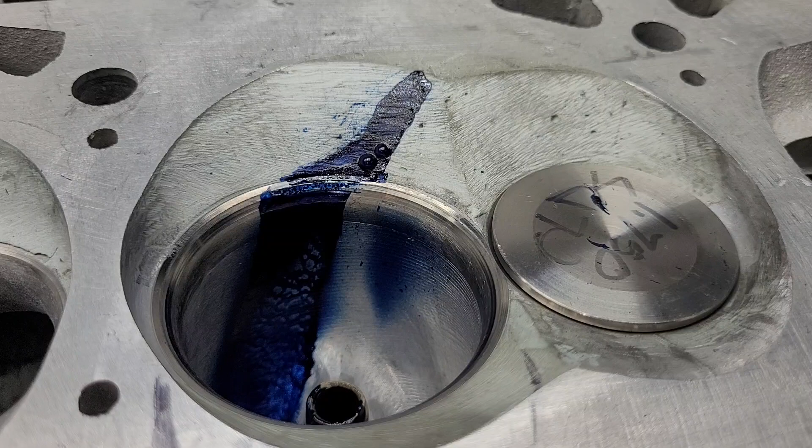Okay guys, we're going to start on the inside cylinder of the old CNC head. I don't think it's going to need a whole lot of work because according to the owner, these were the inside ports that made much better power. And we went over, this would be like the good port in a big block Chevy, this would be like the bad port in a big block Chevy, because of the way they go into the chamber.

I do think it's very interesting that our liquid flow is very similar in the chamber itself to what we had on this side. This side I didn't quite spray enough, but you could see which direction it was going. And it is on the other side of the bowl, right? It's on the straighter side of the bowl.

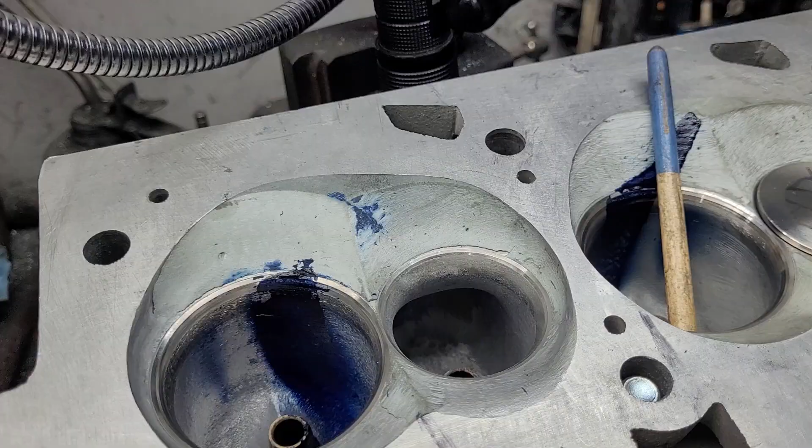Let's do the stick through the port trick. Okay, I'm going to try to do this one-handed. Not easy. Alright, we have the stick going through the port, laying right on the short side. And you can see our liquid flow kind of follows that. We do have a nice amount of liquid on the other side.

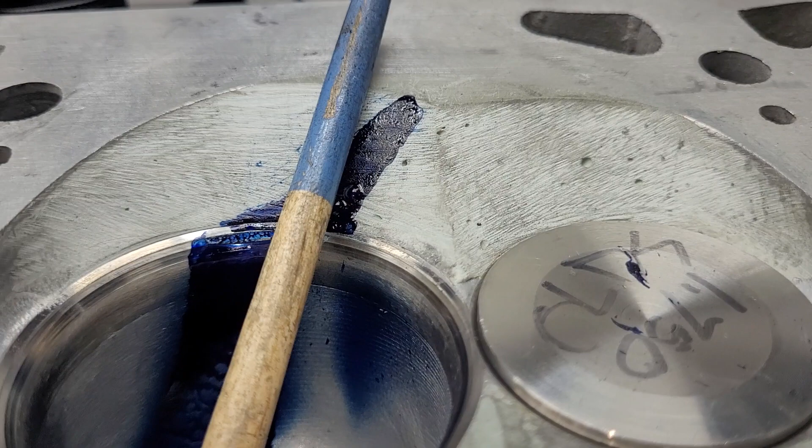Let's take a look at the chamber. I should have said the bowl. Alright, it looks pretty good. Not exactly the same as the other one, but not bad considering the only thing that's been done to this is I had to put a valve job on it because it wouldn't seal. I think that's it.

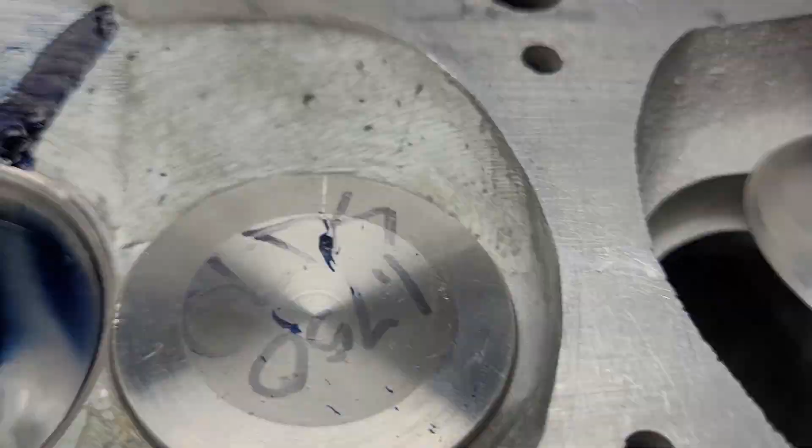The liquid flow on the valve is not great, but I think with some airspeed work we could probably get that better. That is quite a bit thinner than what we've got on the bad port. Is it the end of the world? No, but I would like to get it a little bit thicker if I could.

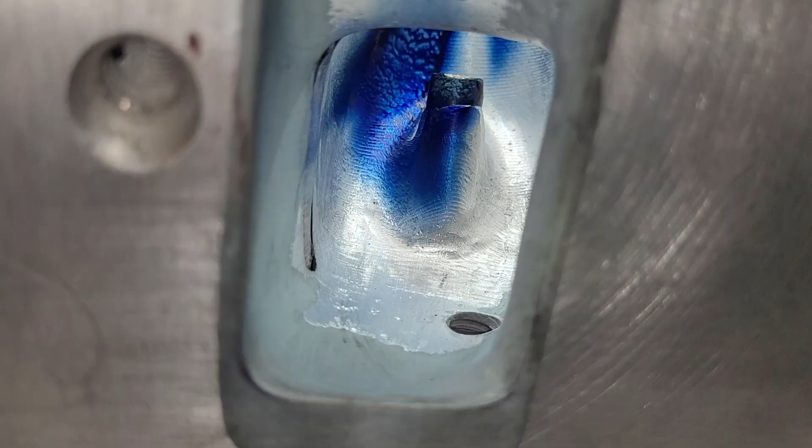Okay, right down its throat, you can see we've got a bolt boss, and we do have a ground out bolt that's fitted to that. Not sure exactly what he's going to do with that, but I'm not going to be changing that much.

I did test it with the bolt in. The bolt has some sealant at the end. Was it leaking? Of course it was leaking a little bit. There's no doubt about it. In order for it not to leak at all, it really needs to be completely sealed, which I'm not doing.

Our liquid flow looks pretty good, actually, I mean, it's a big port. It is lazy in spots. But, like the owner said, this is the higher horsepower port. And if you look, this has a much tighter turn. I think I drew it on top. I think you can still see it. It's got a much steeper turn out for the short side radius. But it works better.

Now, he did say I could open it up for the push rod because notice where the push rod is. It is right on top of it right now. Now, I'm going to take a look at my airspeeds and figure out whether I need to do that or not. Since it is the better port, it may not need that push rod popped out. I'm going to take a good look at that and figure it out.

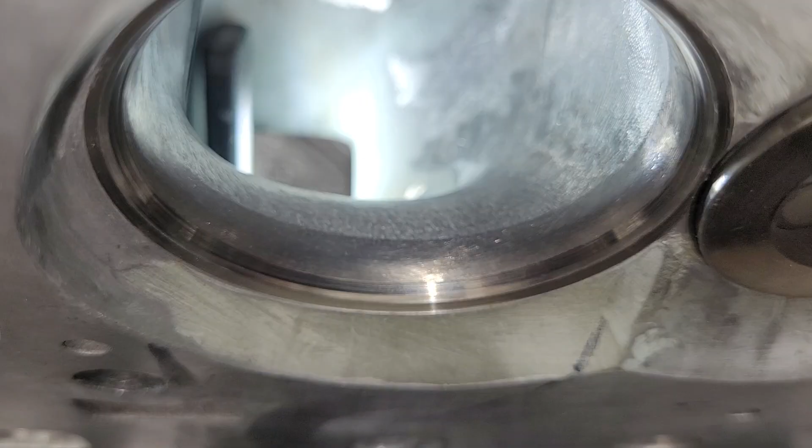Alright, the short side radius is obviously my work. You can see the radius before the bottom cut going into the bowl, and then my light burr finish on the short side radius. It doesn't look like I polished it, which probably should be on the list of things to do.

Okay, this is the short side on the outside port. Let's compare them. Okay, they shouldn't be the same because they enter the cylinder at a different angle. So I will change that a little bit if I think it needs to through the airspeeds.

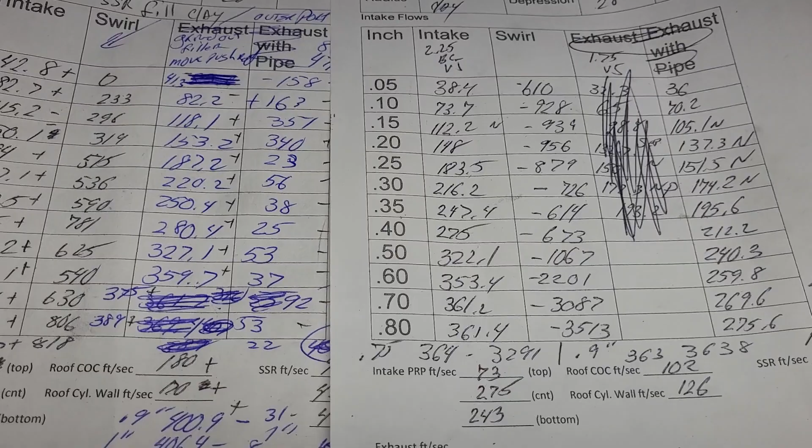Okay, these are going to be the last flows that you saw on the outside, when I ground old body filler and baloney out of it, and got a good gain everywhere with a little bit bigger port.

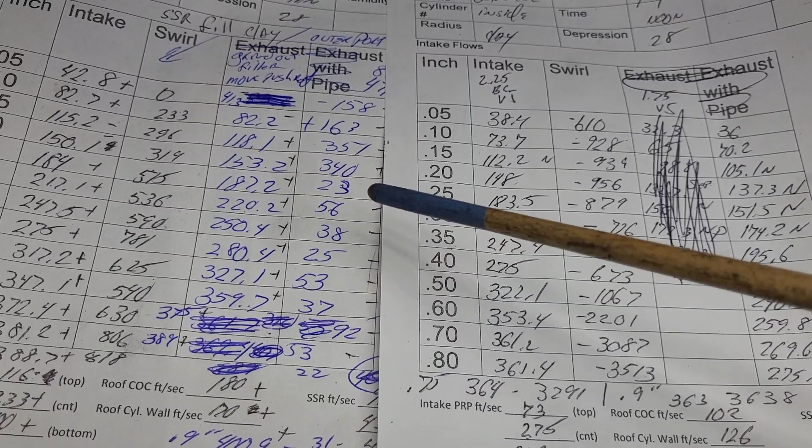Okay, well, how do they compare with the port that just had a valve job and some short side radius work? Is that the better port? Well, let me do my pluses and minuses here.

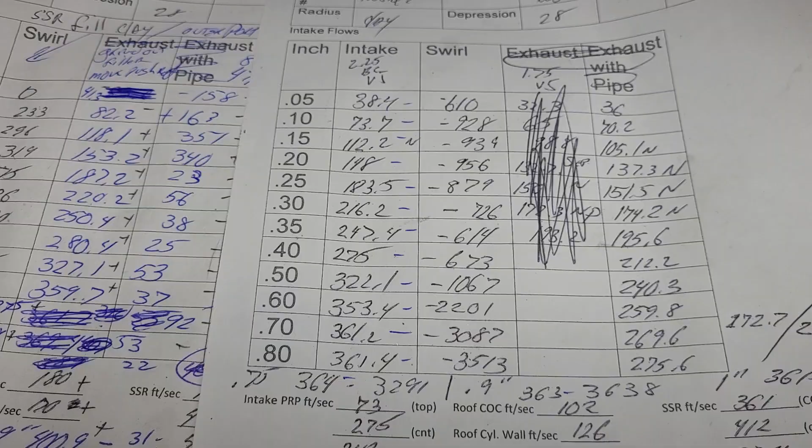Okay, I apologize for the scribble and mess. It really gave me a hard time getting flows out of this, partially due to a hot garage, partially due to incredibly bad guides. It made it a challenge. But let's see how we did.

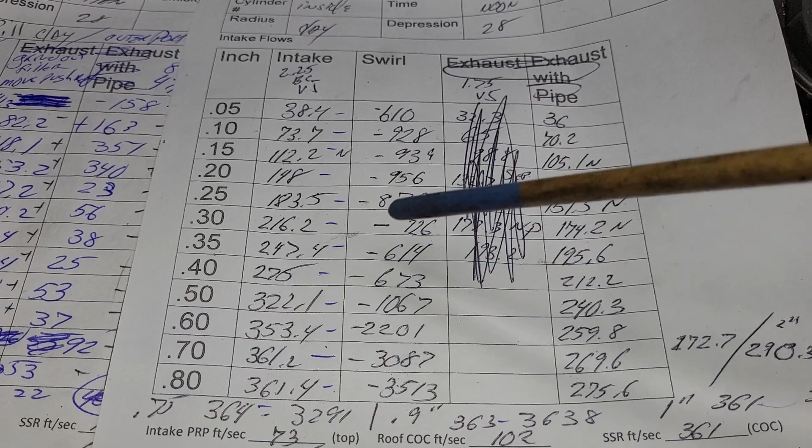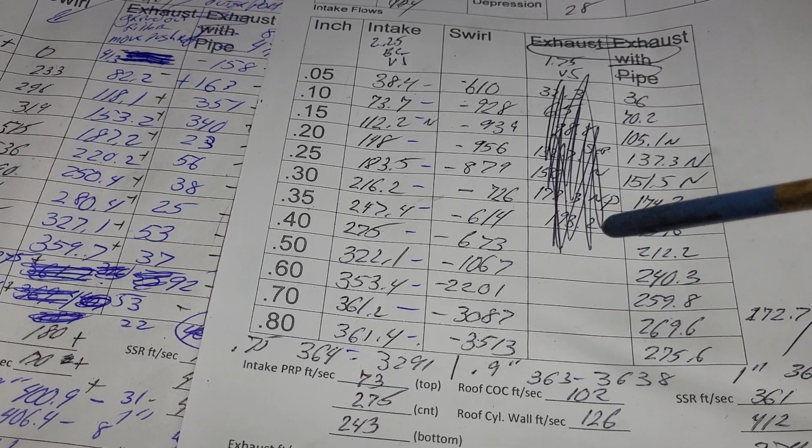We got a minus, minus. We got a minus with noise. Minus, minus, minus, minus, minus, minus, minus. Minus at 750. Minus at 900. And minus at 1 inch.

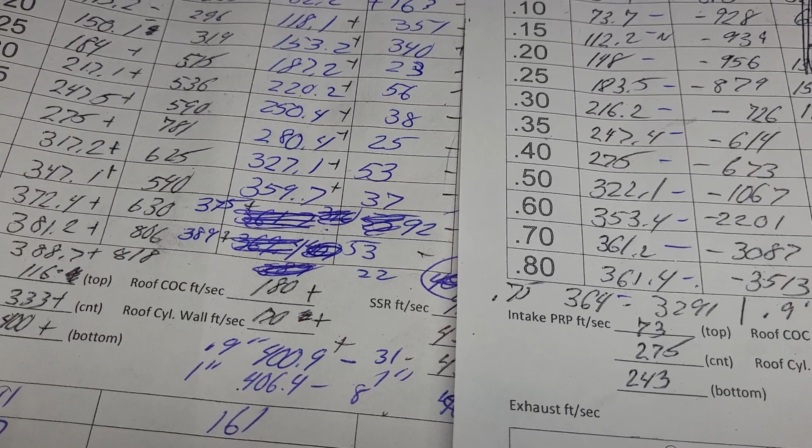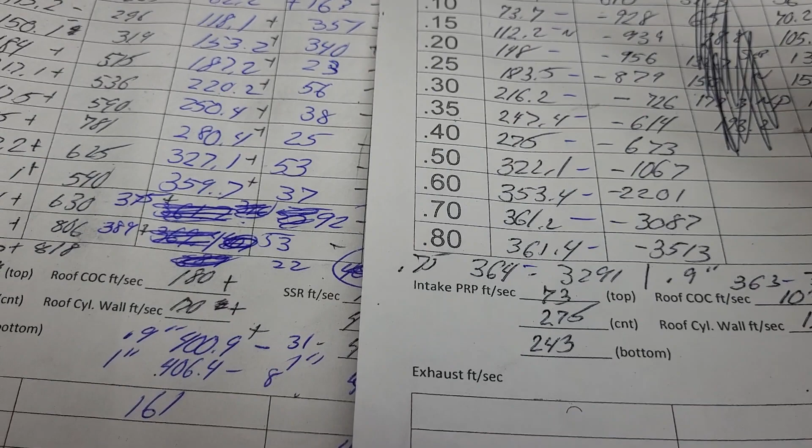Okay, this one over here was 381 at 0.75, 400 and change at 0.9, 406 at 1. Now, I don't think they're going to run that high a lift, but it does give you an idea of the stability of the port.

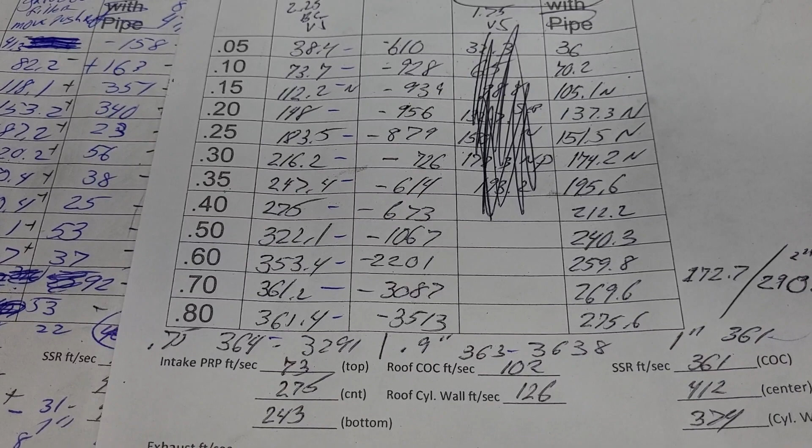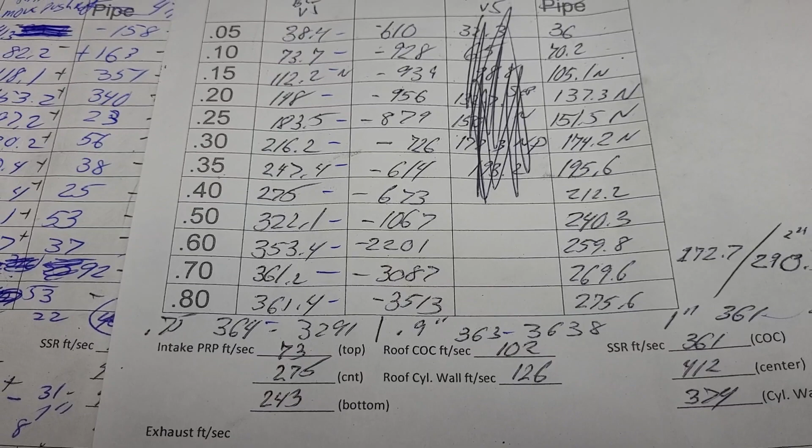Right? We would like to see it keep going up as the valve lift goes up. That would be ideal. If it starts going down, you know it's really having trouble with the short side and it's starting to separate. Okay, let's take a look at...

So overall, it's not bad, but it's not nearly as good as this one. You can see after 600, it stays with it pretty close. After 600, this port just walks away from it. That would make a noticeable difference.

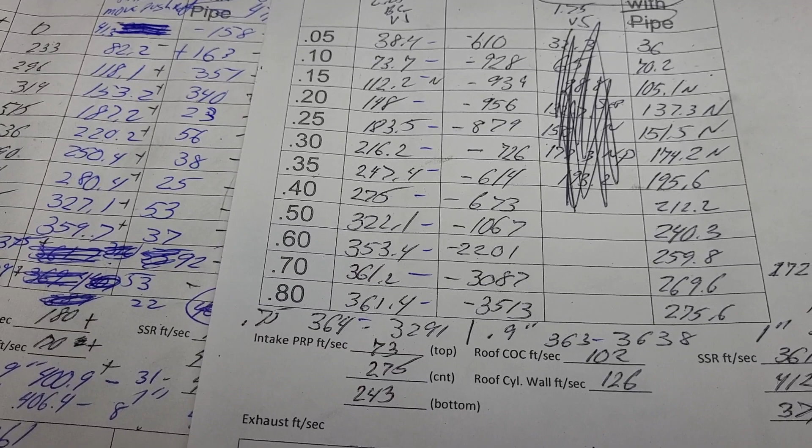Okay, all of our swirls for this port are negatives, which means the swirl is going around this way. It wasn't that way on this one — we actually had our swirl going around the short side on this one, right? This was our negative direction.

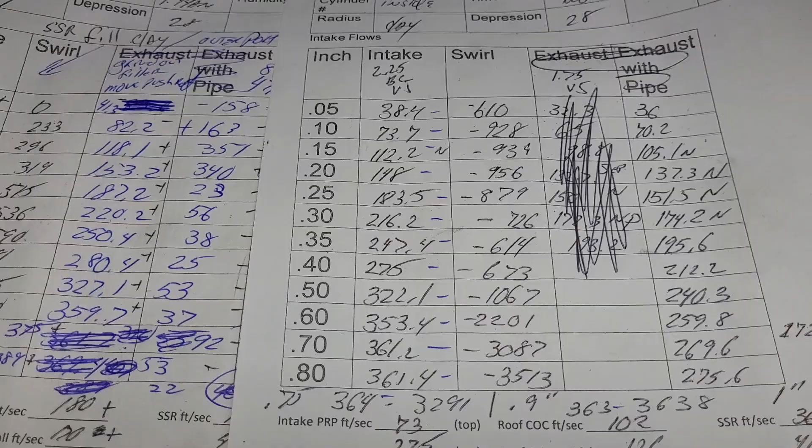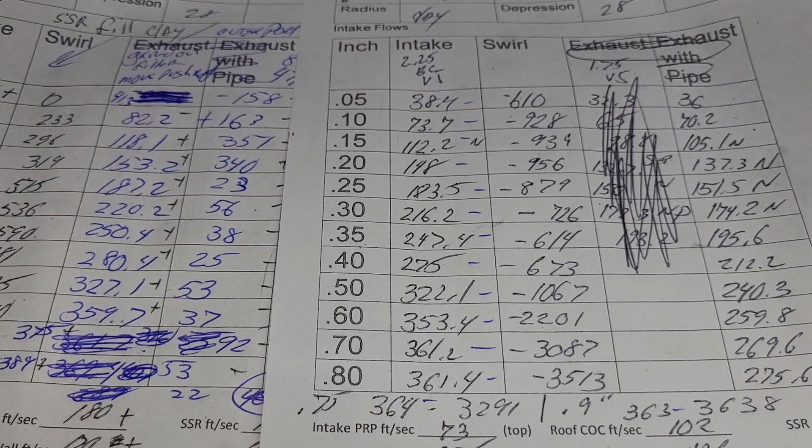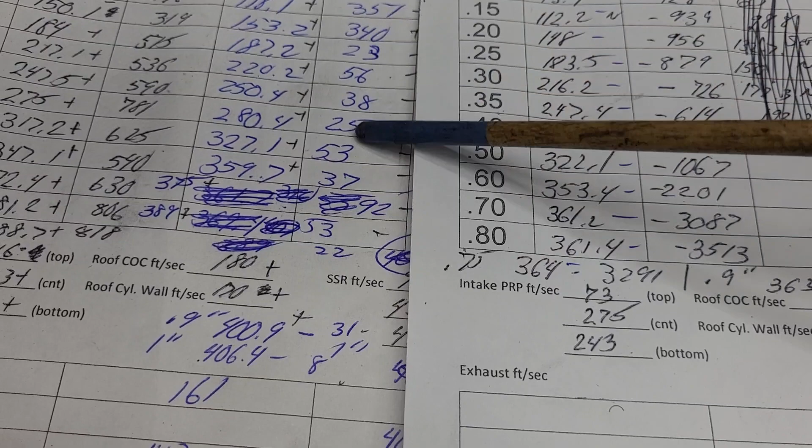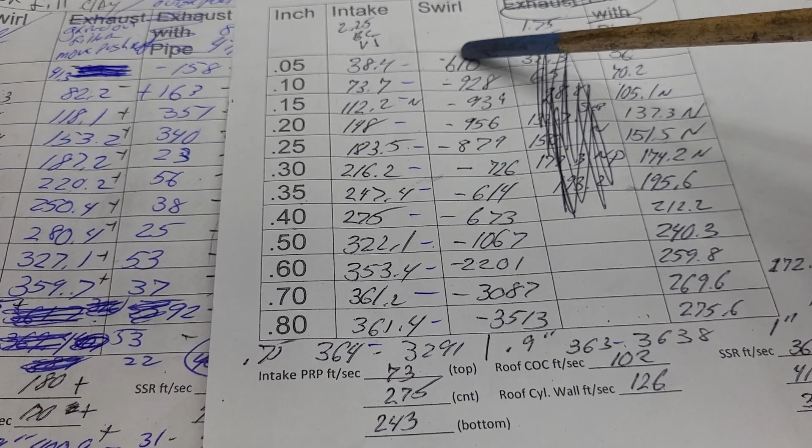This was relatively low, and it stayed low through the entire curve, really. It was a relatively low swirl port because the air is actually swirling in the wrong direction. This one is swirling in the direction we like to think of as right — like a small block Chevy or a big block Chevy good port. And it's got a decent curve, right?

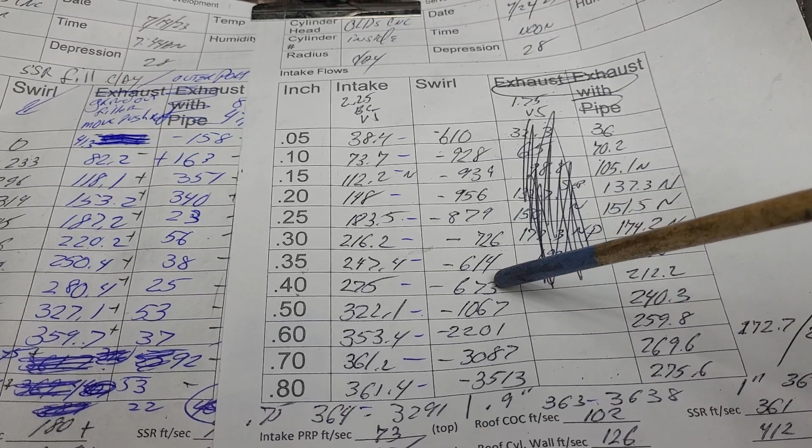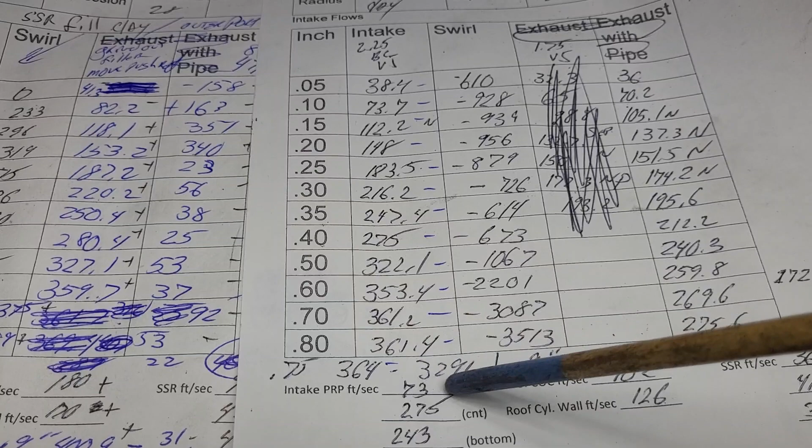It's a little fast in the low lifts, and it's fine at the higher lifts. If 750 is what we're going to run it at, we have way more swirl than we even should have, to be honest. I'd like to knock that back quite a bit, and if I work on the airspeeds, that may happen.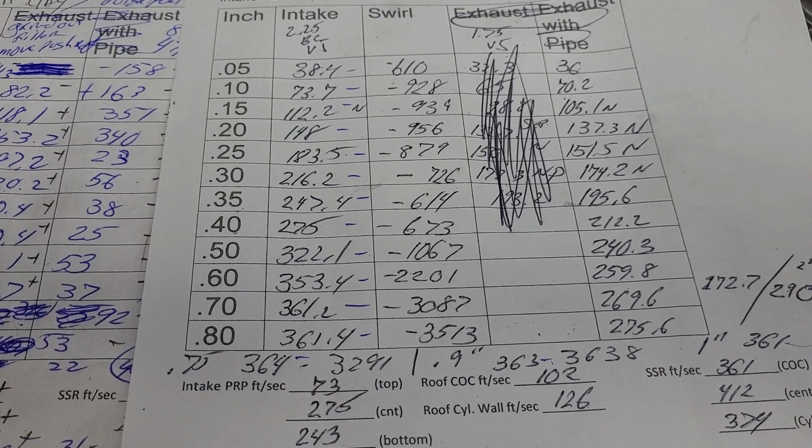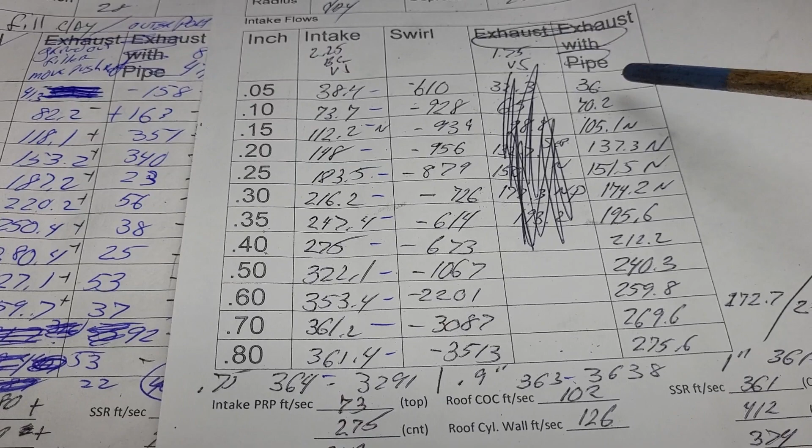As far as our exhaust, the exhaust was a nightmare. I couldn't even get airspeeds on it. The bench was overheating, and the damn guide was sticking. So this is what you got, and this is what you're going to get. Okay, let me find an older...

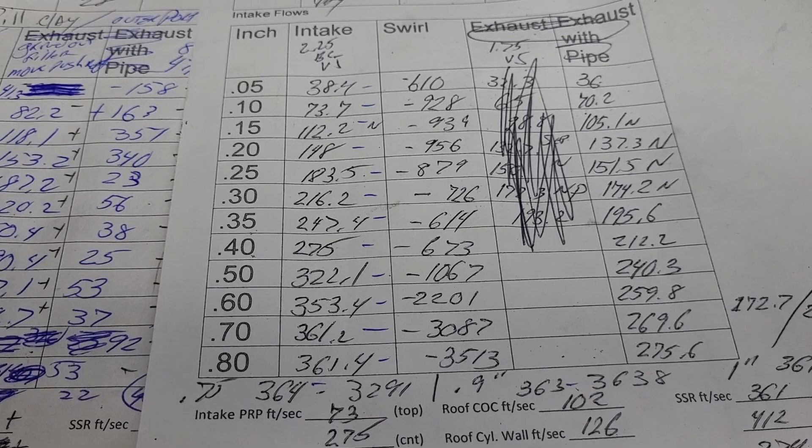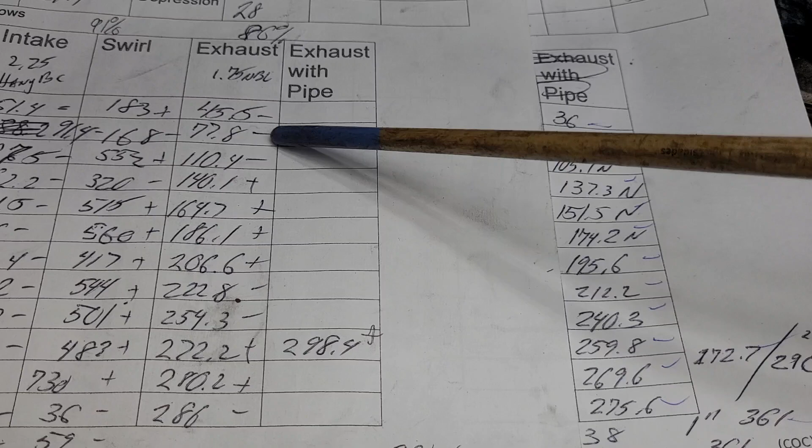Flow file of the outside exhaust port. Now, this exhaust port had some work done to it from me. I did the valve job, I did my radius, and I changed it a little bit here and there to get our airspeeds better than they were.

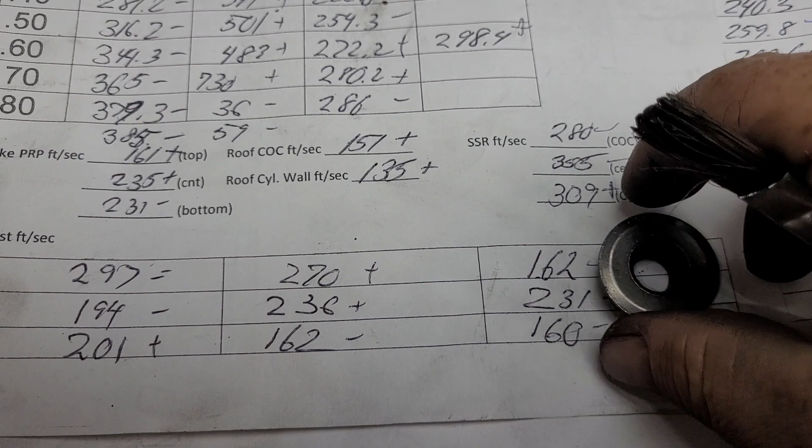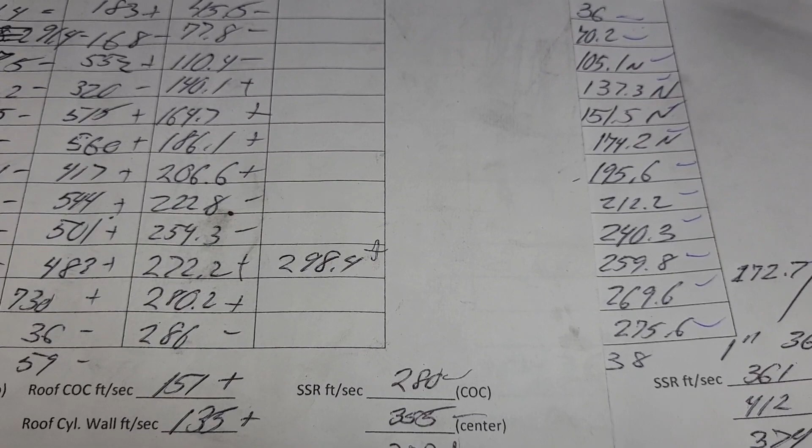This is what our airspeeds were after I did some work to them, and you can see the pluses and minuses on whatever we had before that. It's the latest one I could find. I would say that's probably where it is now, unless I made a mistake, which of course is possible.

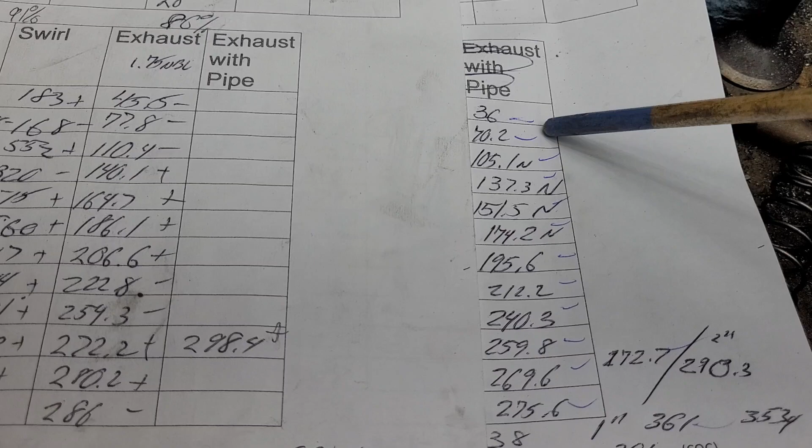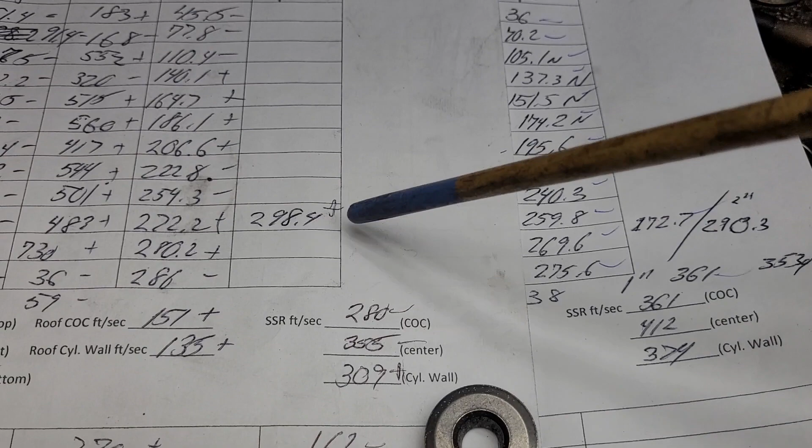So we compare it to what the exhaust is doing now. Remember, I did a valve job on this already, and I did my radius on this — the rest of the port is as the owner left it. Minus, minus, minus, noise, noise, noise, minus, minus, minus, even with a pipe, minus, okay? So the other exhaust port is better.

Now, are they the same exhaust port? I don't know. They're close, but I don't know if they're the same port.

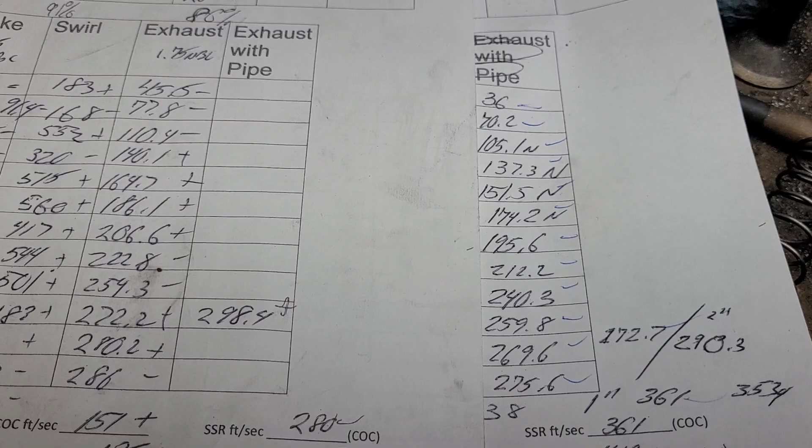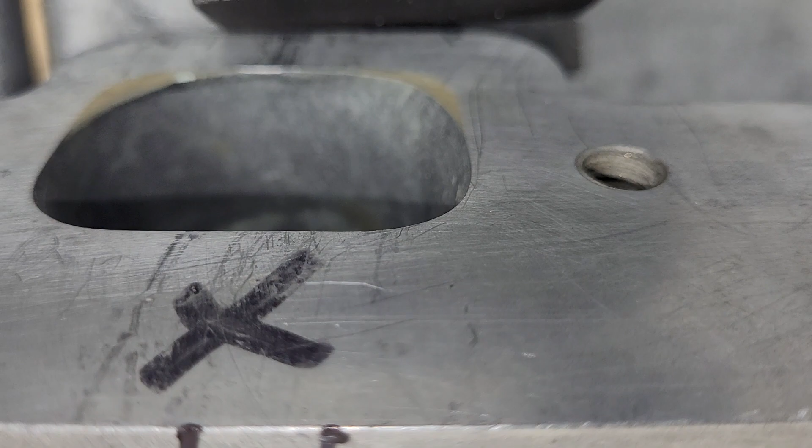Okay, what I did is I just took my stick and made a line from the guide to the center of the port to get the angle. Let's see what that angle is and move over to here. They're pretty close. They may not be identical, but they're pretty close. So that exhaust port looks pretty close from one to the other. As far as the bowl, this one has...

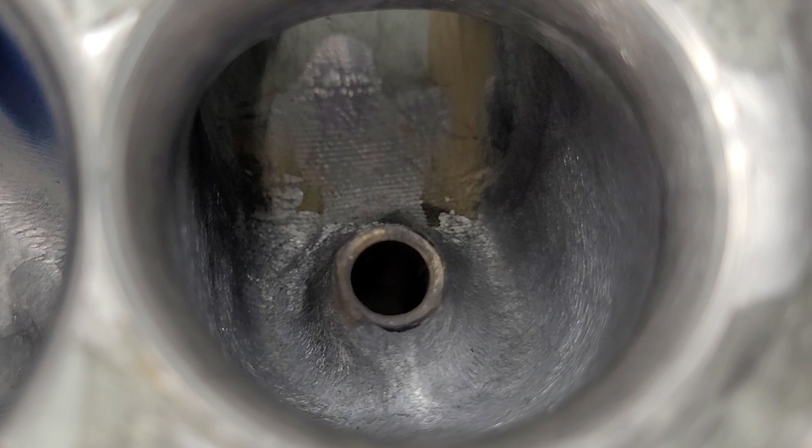It looks like I did do some work inside that bowl already. And this one I know I did work on. But I didn't do any work to the roof, you can still see the CNC lines. So I did the radius, I did the valve job, I did the radius, and I did part of the bowl work, which makes sense.

Okay, the outer port, short side radius. Inner port, short side radius. It looks like I've done them both the same.

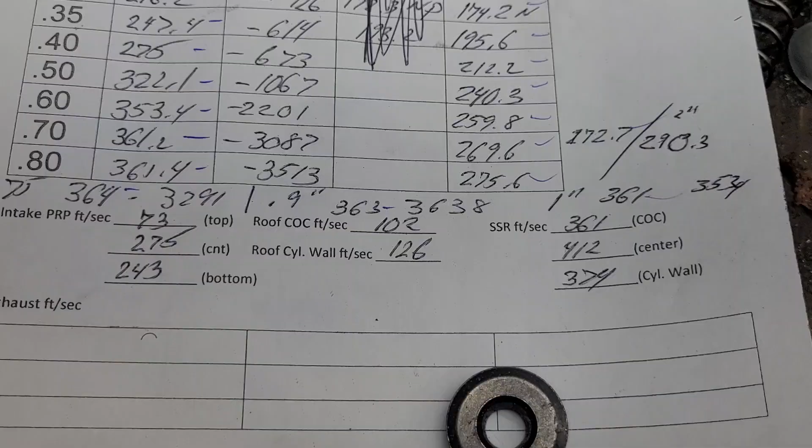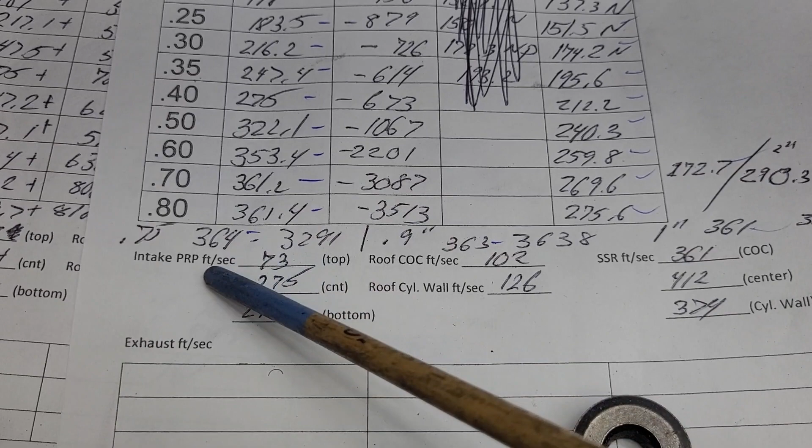All right, we're just going to go over our airspeeds on the intake. We don't have airspeeds on the exhaust, and it's not that big a deal because I've done a lot more than I thought I did. But what's interesting on our push rod pinch, top is completely dead. Now, after I did work on the other one, that push rod pinch cleaned up quite well. Let's get some of the outer numbers up.

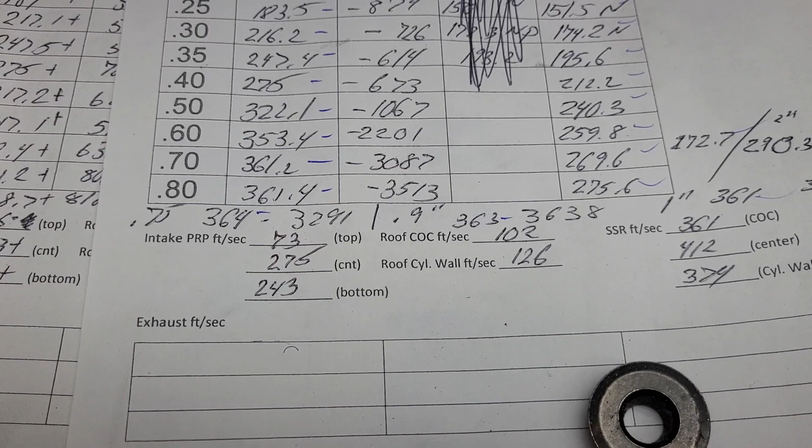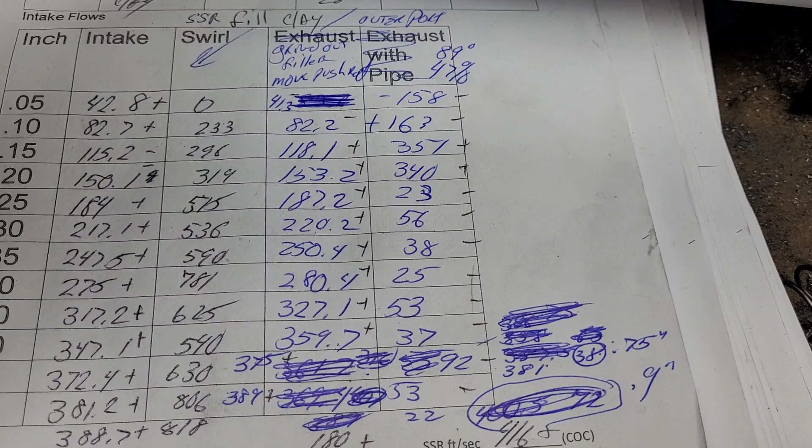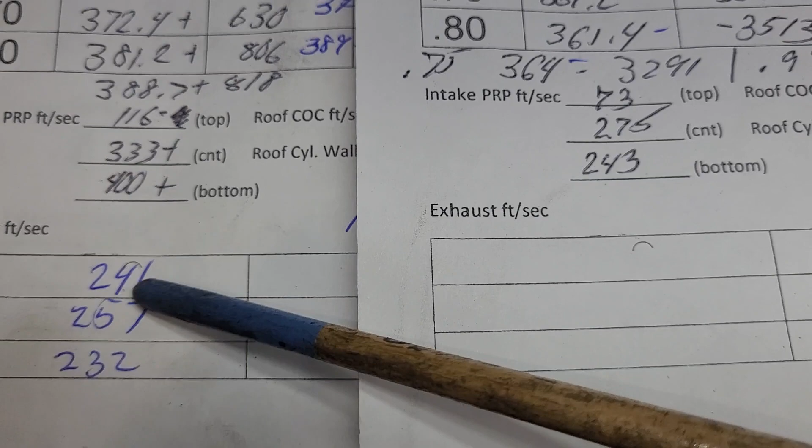Okay, those bottom numbers are our numbers for our ground out port. And this is where we are here. Big difference, right? These were quite even. Very happy with those. Not great here. Okay, so this could use some work.

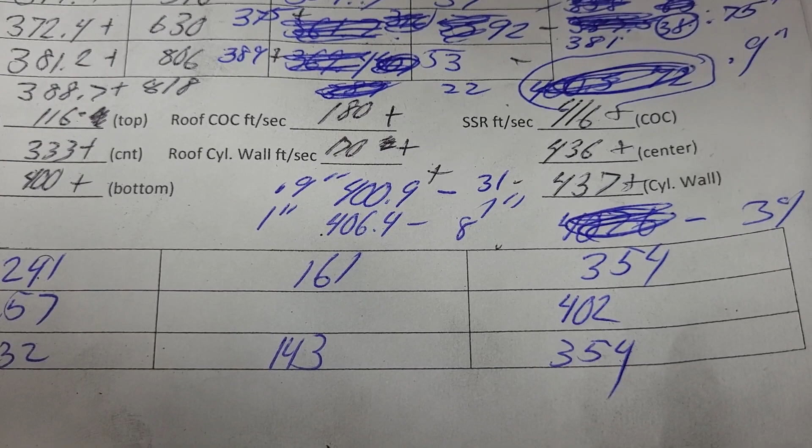The roof numbers improved quite a bit. It was also moving a lot more air, right? Those were measured at 750. These are measured at 750. That roof is pretty slow.

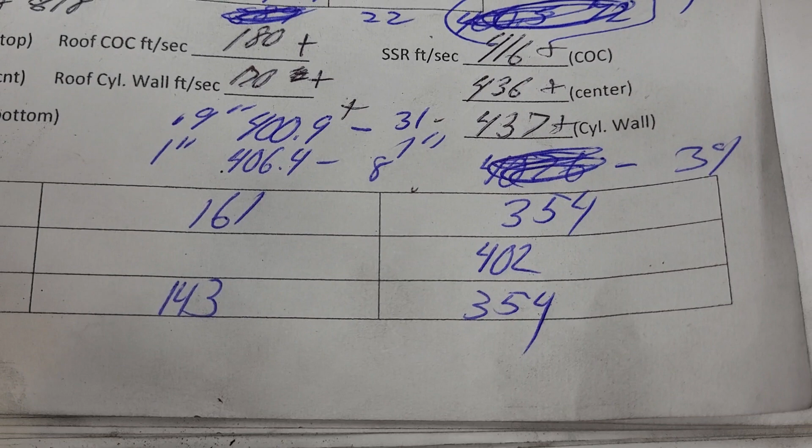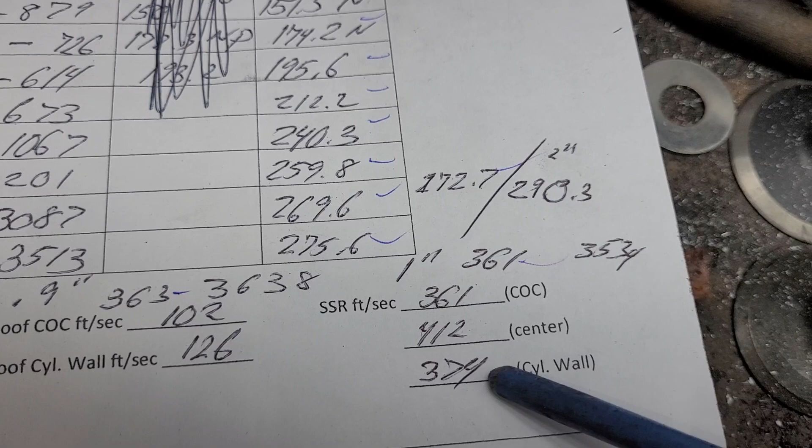And our short side was nice and even from side to side, a little fast in the center, but I think we can live with it. What do we got here? Really not that bad, it's a little bit faster all around. A little bit faster in the center, a little bit faster top to bottom. It's not that far off side to side.

So I think that'll just take a little work and we'll get that a little bit better. I don't think I'm going to waste the whole life on this because I think I put enough hours into these already. It was really the outer ports that needed a lot more work, and I'm pretty happy with the way those are set up now.

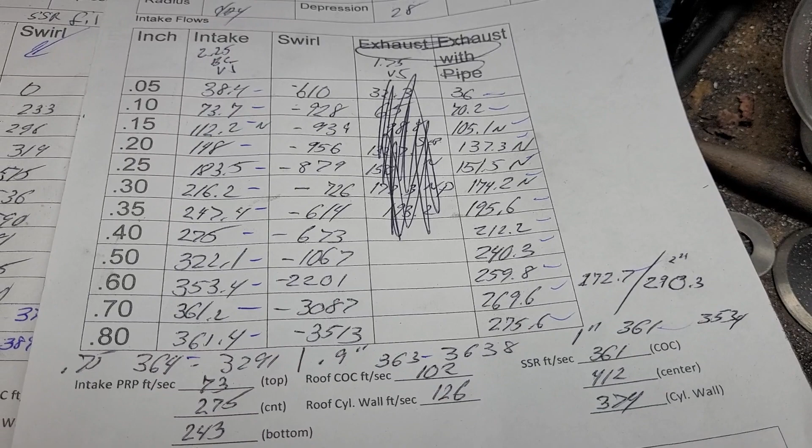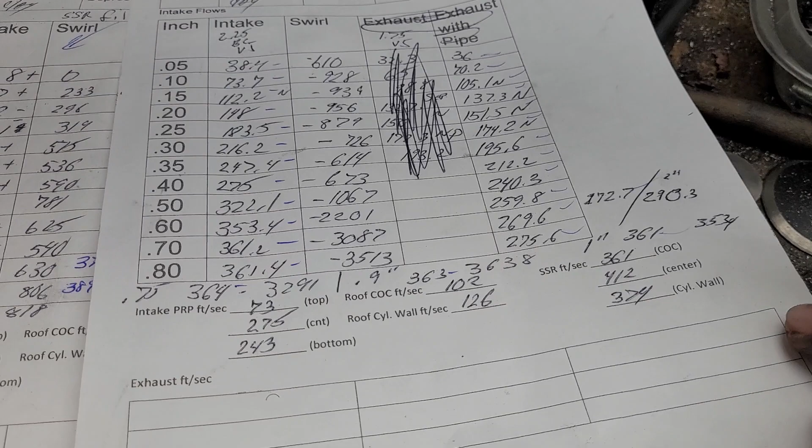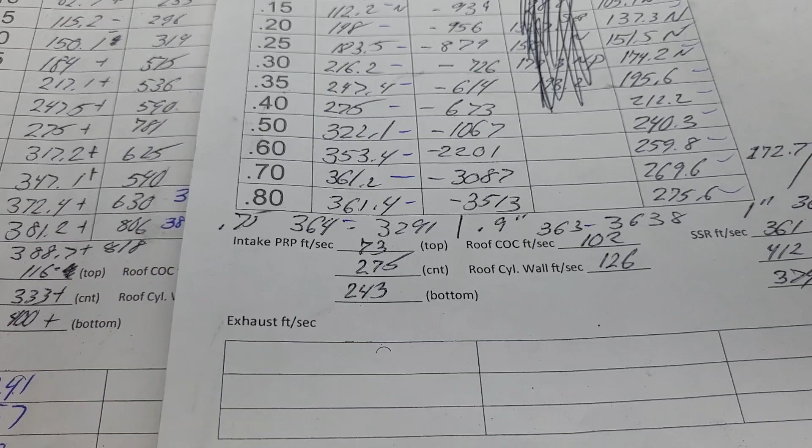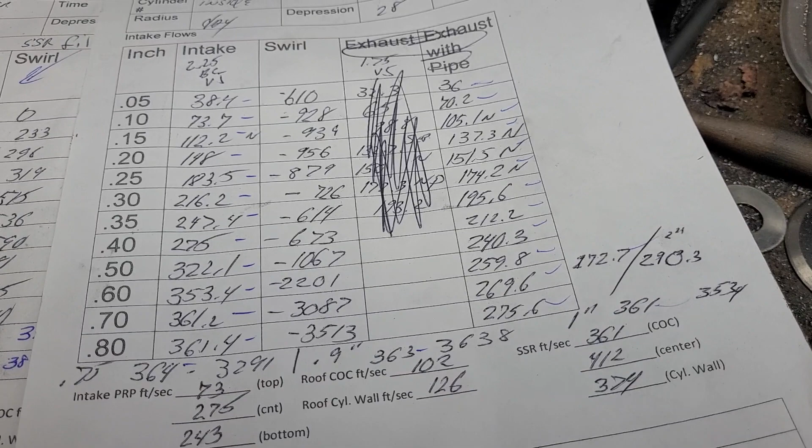After he runs those numbers through the program, I'm going to say on a 500 cubic inch motor, I'm going to take a wild guess and say with those kind of flows, 381 at 750, should be able to get almost 1,000 horsepower out of that. Not bad for a street mill. Have fun putting that on the ground, but you know, that's different. That's a different thing. Guys love the big numbers for bragging rights, which is fine. I got no problem with it.

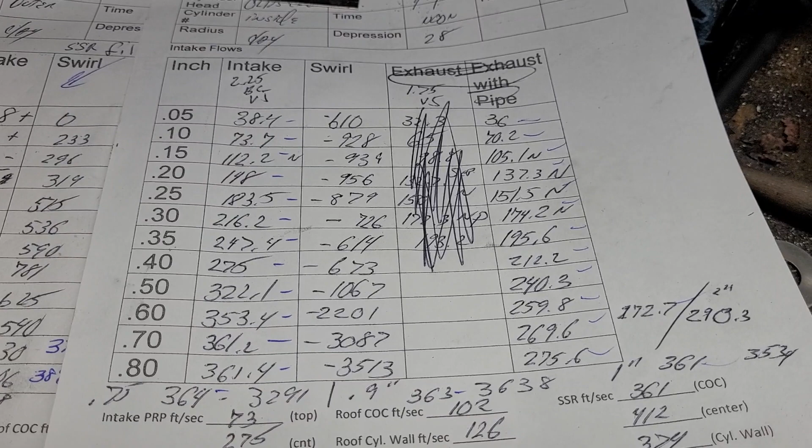But I think that's one of the problems with the new cars that make a lot of power and the reputation they have about crashing. Tough to put that much power to the ground safely.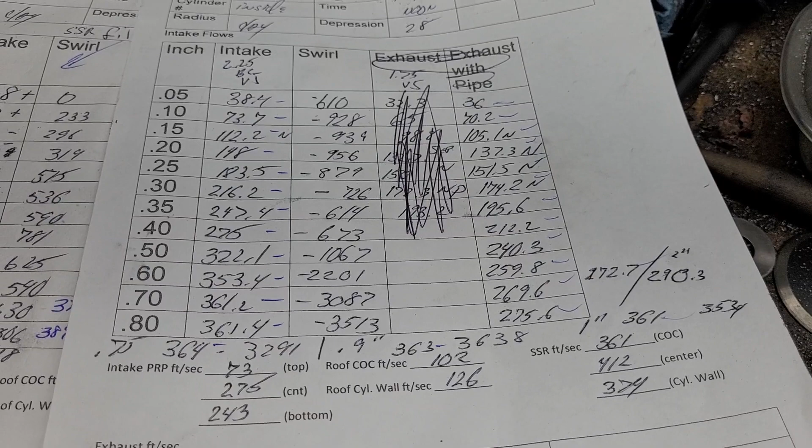I did forget to show you this view, which really is not bad. I like how much we've got on the other side of that guide. And I think a lot of this is just going to get cleaned up. Maybe get some of that body filler out of there that we don't need. And send it. Thanks, guys.